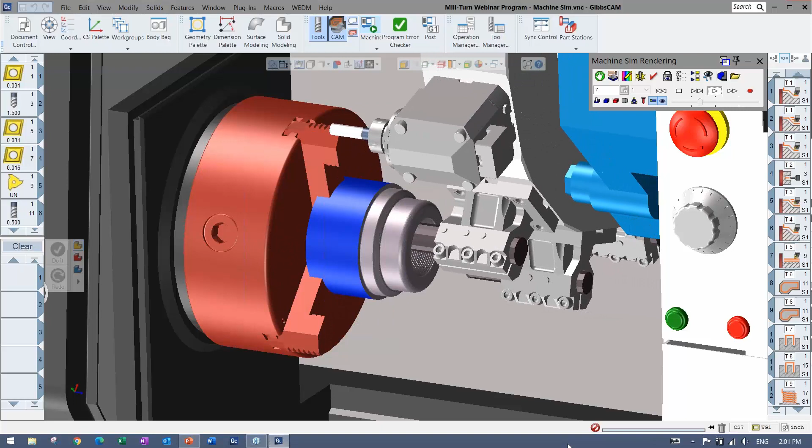I'm going to get right over to Gibbs here, and I have the part that I'll be demonstrating. You can see the full setup where I have a whole machine sim, the machine in there, fixturing, tool blocks, all the tools well defined. This webinar's purpose is just to show off how smooth and simple it is to go between milling and turning when using a machine like this that has turning but also live tooling in most situations. In some cases it can get even crazier with milling heads and lathes.

So we're going to focus in on a single turret and a single spindle, and I'm going to walk through and highlight all the little things. I'm not going to go too much into training mode here, I just want to get the point across of how it can be used, and we can go from there.

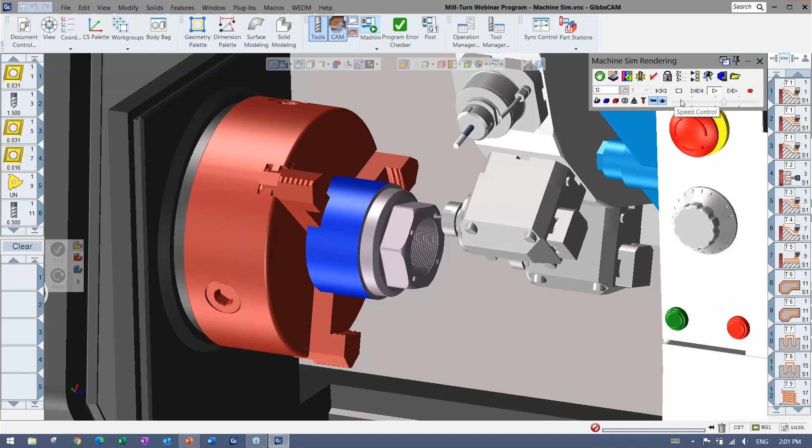The simulation itself, I'm not going to have that in the file right away, but you can get an idea here where it's really ops on the face, the OD, anything that you would expect to see.

All right, so I'm going to open up a file. I do have files that I'm going to be loading just to keep things smooth and running on time here. So the file really doesn't have anything done to it other than I've selected the machine quickly, and I've put in the stock and clearances.

I've even brought in a fixture here just to show you that you can do that. Bring in a model, download it, whichever, very easy to use. And you can hide it, it doesn't have to be shown at all.

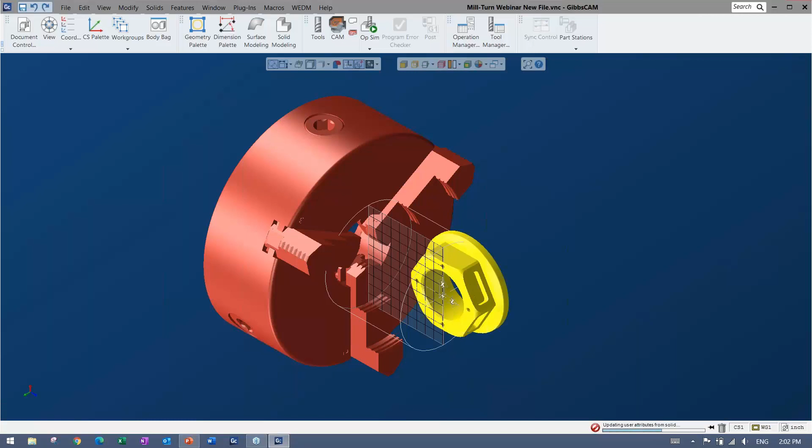I'm going to bring in a part as well. The part, when you're cutting something, can be a model like I'm going to bring in. I'm just going to import my part here, and you'll see a solid representation of it. But you can import wireframe geometry, draw wireframe geometry, dimension, modeling, all that can be done in GibbsCAM. So wherever you end up starting, you'll have something to cut in the end and to apply the actual tool paths to. You can see here everything's nicely defined.

Now once you have your part in here, there's lots of very good display preferences. You can hide things, show things, colors. Really the whole interface is very customizable.

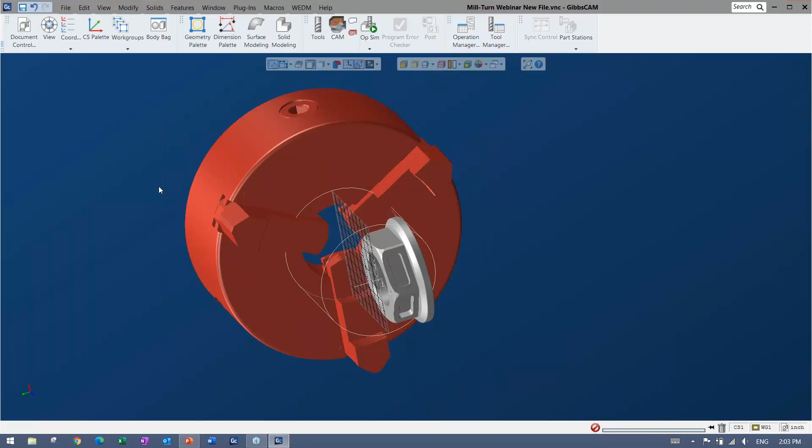Anything can be moved. So I'm using the default layout, but just know that as I go through, you can change it and add shortcuts and all of that good stuff.

Moving things around is also very simple. There's a view palette that you can use. I prefer to use shortcuts and my mouse or a space mouse. They're all available, and they can all be customized so that it's the same as other software too, which I find is very important when you're switching between them.

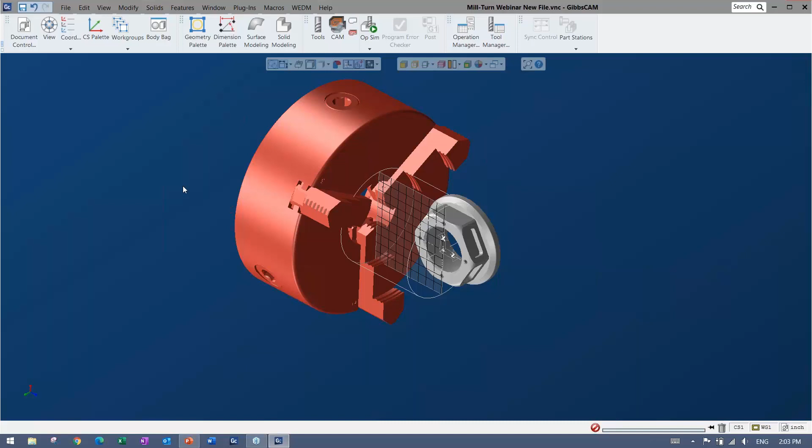Okay, so the first thing I'm going to do is I have this chuck here, and I'm just going to send it to this thing called the body bag. That's a little manager for the solids, and there are different levels as well that I'll get to when I'm engraving something. All right, so all the good stuff is there, and it's very easy to access even on the default layout.

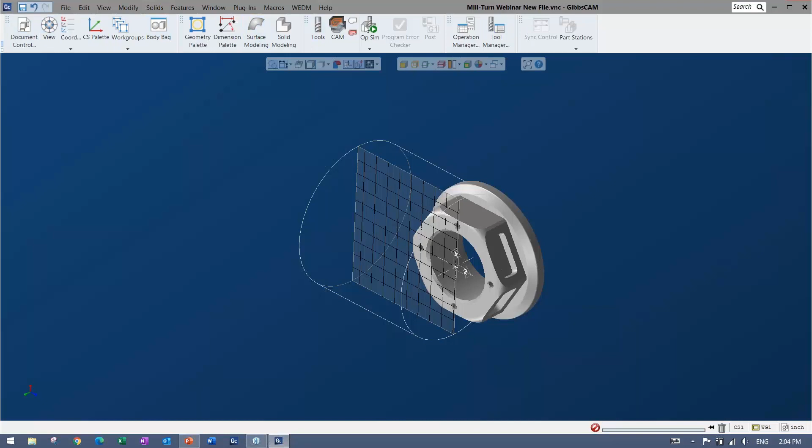Now, you can see my part didn't quite come in the proper way here, and there are plenty of tools to move things around, to locate your part, rotating, translating, all the good stuff, and some little shortcuts too. So this does come up for me, depending on how the CAD modeler has modeled things.

It could possibly come in the wrong way, and I'm just going to go in and bring up the CS list. These are coordinate systems, and you'll see them come up again, but basically just a machining plane, and I can go ahead and align this part to that plane. It just takes some of the angle out of it. Even if it was a severe angle, you could do a multiple lineup, lining up to one plane and then the other, and then be ready to go and machine your part.

So I'm happy with this. It looks like it's in the right orientation. There are plenty of tools to check it, but I know I'm good, so I'm going to go ahead with that.

Now, I want to cut, so I have something to cut. Now I need something to cut with. So that's when it comes into the tools. I find the workflow with Gibbs is very, very easy to understand.

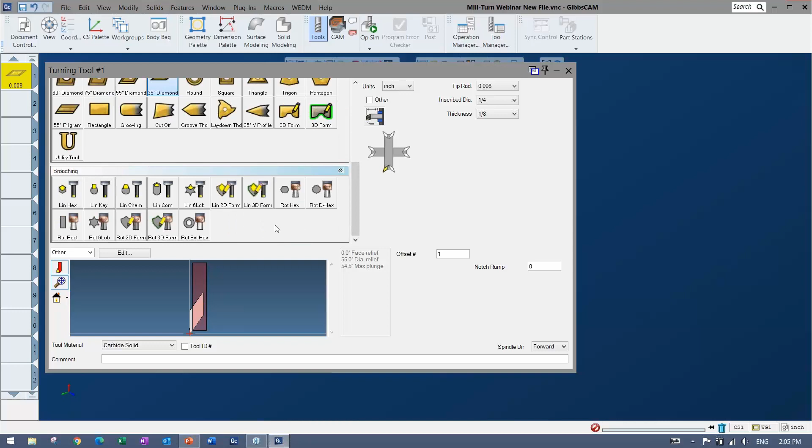It doesn't really change whether you're doing turning or milling. You can see here that when I make a tool, first thing you do is you pick a tool form. In these cases we have some milling tools, so that would be live tooling in our situation. We have our turning tools, and we even have some broaching, some linear and some rotary broaching in there.

All of these do have a form tool equivalent, as well as the tool holders. So you can draw, you can import a wireframe or a model and apply that as your tool shape as well. Once you pick something, you fill in the size, fill in the holder information, and then you give your offsets, can give a little comment, and every tool is like that. So if you're making a tool from scratch, it's very simple. It's easy to find your way around.

Now, as you get into programming, the better thing would probably be to have some way to bring in tools. So I'm going to be doing that coming up. You can definitely load tools and all that good stuff as well.

Let me just pick maybe a standard insert here. Tool holder on it there. And you can see the preview is all nice and 3D as well. Boring bar.

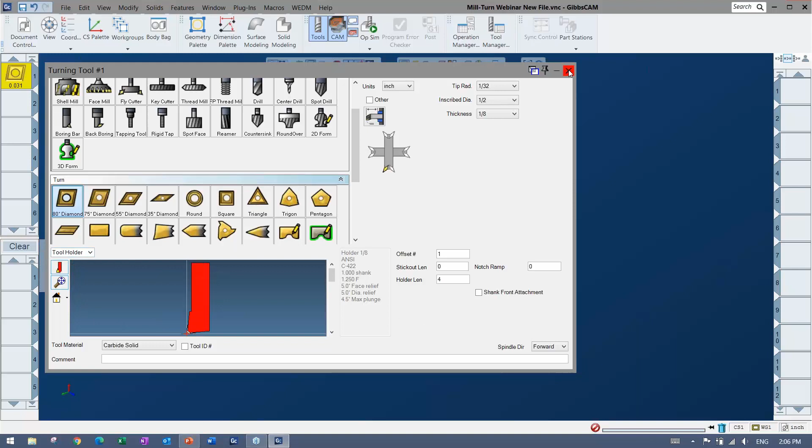So once you have a tool, whether it's a milling tool or a lathe tool, you bring it down to what's called the process list. This is really where everything gets added together and set up before you actually make it into a tool path. Now, depending on your license, you may or may not have everything that you see on my screen.

But this is how it works, where you either drop your tool down in here and you get access to the process types, or you can go it the other way around and double click here, select a process type, and it will filter through all the tools it thinks you can use. And you pick it, and then it all gets there in the end to a dialog that would set up whatever you're setting, whatever your tool path process type is.

So whether I'm doing a contour here or roughing, threading, there's elliptical contours. There's a process for pretty much everything. We're going to stick to certain ones here, but if you don't see the ones that you wanted to see, then obviously you can put in a question or ask your local reseller.

Now those as well are loadable. So the best way to do it, you have to make your tool most likely at some point, but I actually have my tools and my processes created, again, to keep things smooth and keep things under the time limit.

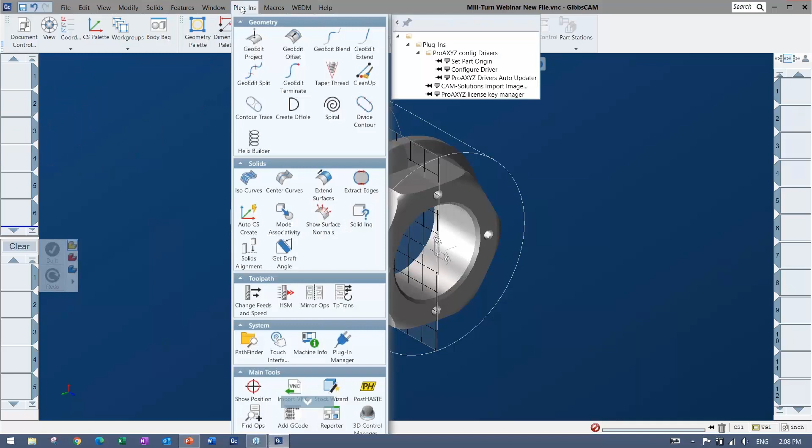So you can load tools here, and there's tools that you can save yourself. You can also use different plugins, like Sandvik has CoroPlus. There's also the Helical Solutions and the Harvey tool libraries here, and some other solutions for that as well out there.

So in that case, maybe I have a process already set. You can see here I've created a folder, and it's just Mill-Turn webinar, but I'm going to go ahead and load out of that. But you can make your own folder system by machine, by material, by tool type, whatever you'd like. And when you load it in there, then you can see if I load a tool, I get the tool.

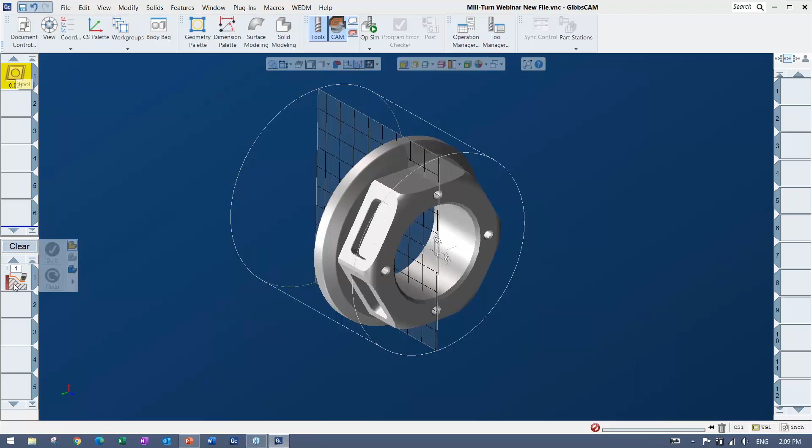And if I load a process, I get the tool along with all of my parameters filled out already. So that could be anything from feeds and speeds to what type of process or what type of cut you want to do, right? So the one that I've imported here is the facing process.

All right, so we're going to put that onto our model. And again, the workflow is always the same. You'll see as I go through, make tool, drop tool down, pick what tool does. You get a dialog. Everything's all in that dialog. There's no hunting around trying to find different things. And once things are filled out, then you can apply the actual toolpath to the part.

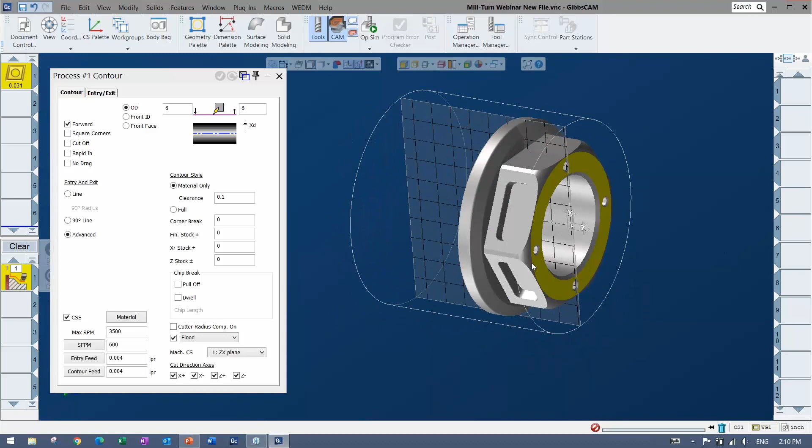So that's the place I am at right now, and depending on what process you use, there's different things to select. I could be selecting the model, or selecting some wireframe geometry. I may extract some geometry from the model, or if it's already drawn, I can use that.

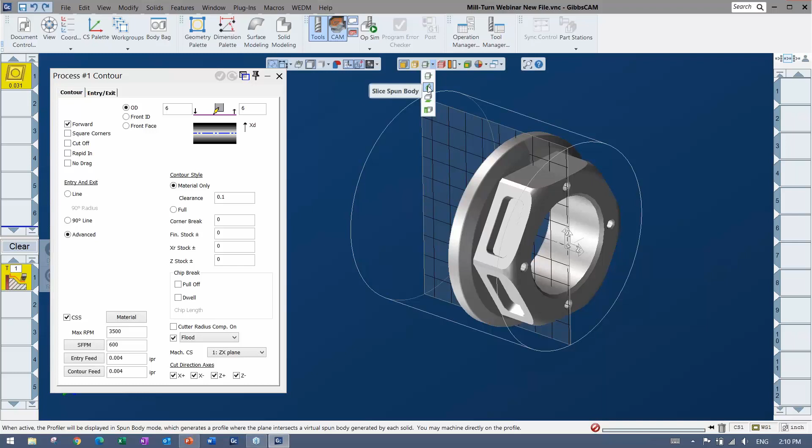In this case, I'm going to bring up something used to turn on solids. It's called the profiler, or the slice plane. It has a certain mode. If you see the slice plane just as it is, you can see that it slices through, and it's not really what I want to use to turn this part, because if I turn this guy, it's going to gouge in the higher areas.

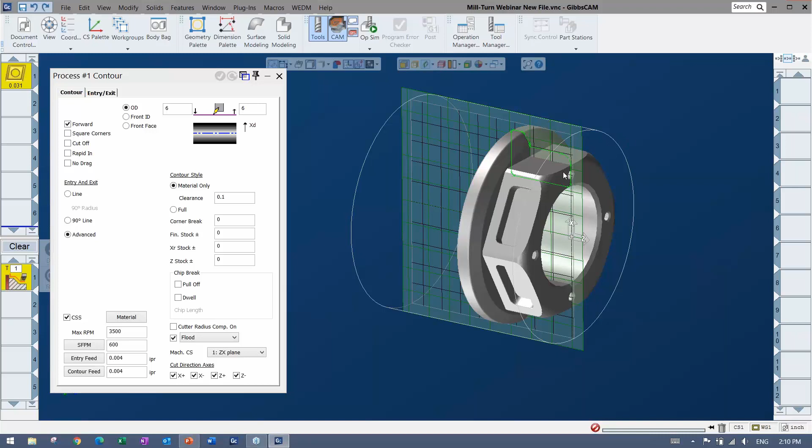So what I'm going to use is slice spun body mode. That one's really great because you can never bring that slice plane off zero, off the center, so you know your diameters are right. You can also see it's showing all of the highest points, and getting rid of anything you can't hit while the part's spinning, like these holes are not being sliced anymore.

And you can extract geometry off of that, or you can just go right in and use the profiler. So that's going to be what I'm going to pick for this specific toolpath. A contour or roughing, anything with a specific shape, is usually going to need some kind of profile like this or a model.

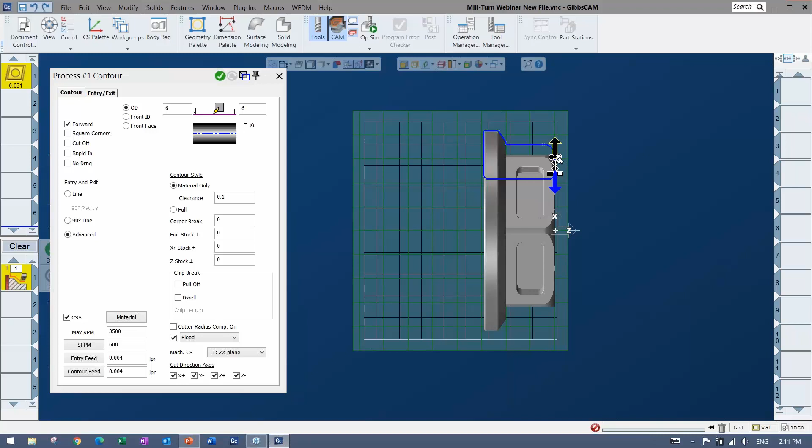Now when applying, in this case, our lathe processes use these start and end markers that are quite easy to use. That's just about where you want to start and where you want to end, and what direction you want to go. And then whether you want to go all the way around or one skim on the face, like this.

I'm ready to do the toolpath right now, but I'll mention you can move these by specific amounts and all that. You might see that come up. I'm just going to kind of place things where they are and rely on this material only to prevent any air cutting. Even though I drag this up here, when I do the toolpath, you'll see it avoids that.

Now, once I'm ready to make the finished operation, notice my operation list over here is empty. So I'm going to go in and say do it, or anywhere I right click, there's a do it. If I click that, you can see the toolpath appears, and I have my finished operation over on the side.

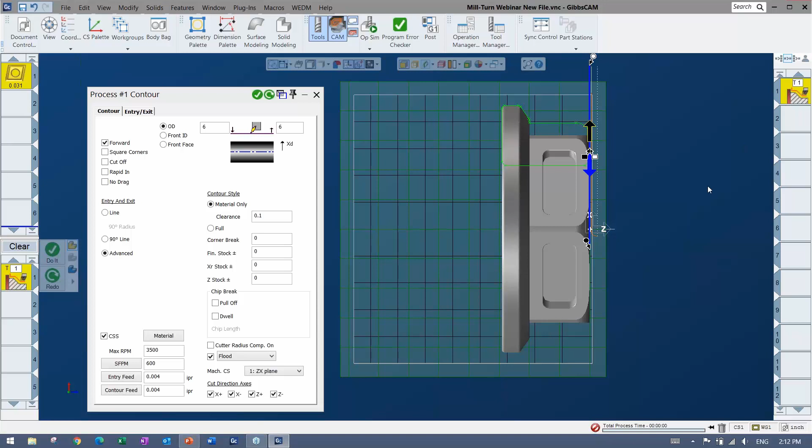Now, if I wanted to change something about this, that's when redo comes up. Redo will recalculate the toolpath based on whatever changes you made. So if I didn't want to go down as far, let's say, you can see that it shortens that guy up. But once again, it knows there's material being removed, so even if I drag it past that center mark, it doesn't go past. I can always override that as well.

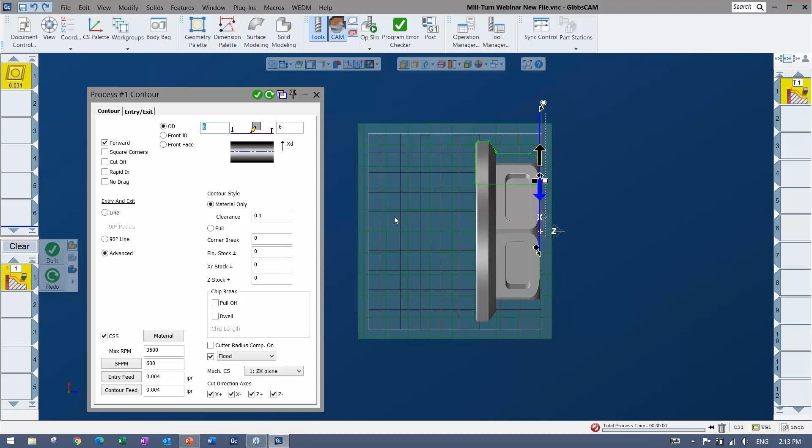So that's the gist of adding the toolpaths, and I'm not going to go into much about what each thing does, because I get into training mode sometimes. But I'm just going to clear this off, and I'm going to go ahead and check out the simulation now.

Right, so we have an operation, and I'm wondering, I want to watch that. So what I can do is start my sim, and there's a couple different simulation modes. There's the one that you saw with the whole machine and everything, and then there's the one that back plots, where you can rewind and play. This one is also a nice one called OpSim, and it'll show whatever you want to play with, tons of useful options. I'll bring them up as I look through the rest of the toolpaths, stopping anywhere you want, different colors, checking to see if the simulation matches the part, etc.

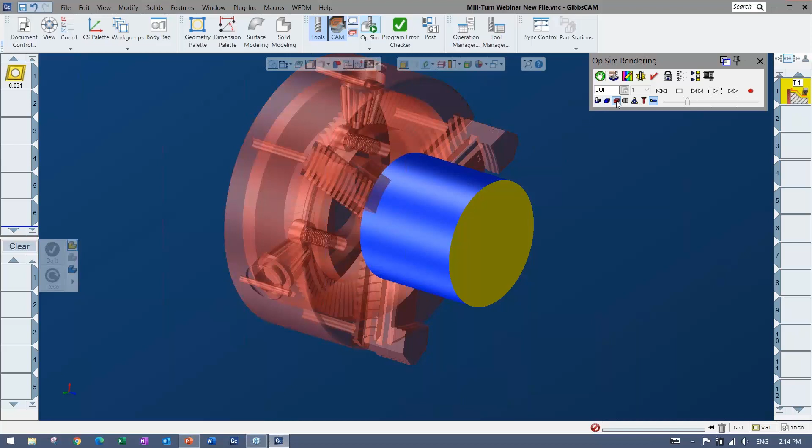All right, and you can see, even though my picture was hidden there, it's showing in the sim, and I can always turn that off as well, or make it transparent or anything like that. You can see I have every little part in there of that picture.

So I'll pop in, and you get to the point where by just looking at the toolpath, that's probably going to be fine. If you see a little line going right through the part, then that's probably when it's bad. But I'm going to try not to do that.

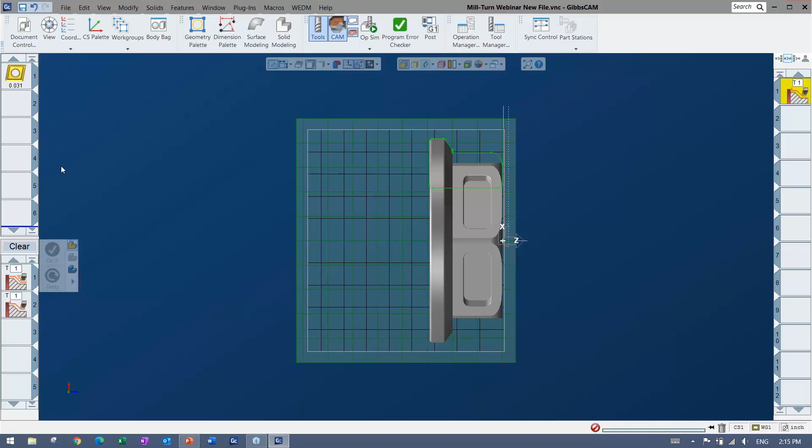All right, I'm going to load a couple more in here. Not going to dwell too much on it, but here's some roughing and finishing, let's say. You can see these are stacked together, and they'll apply to the same selection that you make. You can do roughing and finishing tools, and here you can see that one's using the same tool and it recognized that, so it's not going to make me a duplicate tool. This one's going to go ahead and rough this in.

All right, I'm going to start picking things out here, and depending on what you want to rough, there's little shortcuts. You just do something like that, and that selects everything that I want to cut. I can say do it, and you can see it generate the cut there.

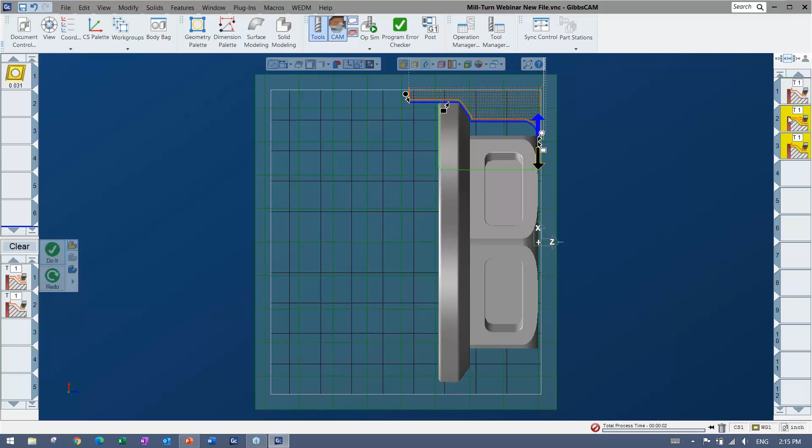And I have 2 more operations. Again, I can pop open the simulation if I want. I can play it and check, is that okay? Anything crashing at all? I actually put on this one, it's hard to see, but there's a chip breaker. I thought about using the pull-off, but there's lots of options in there once you start digging that you can use. But nice and easy.

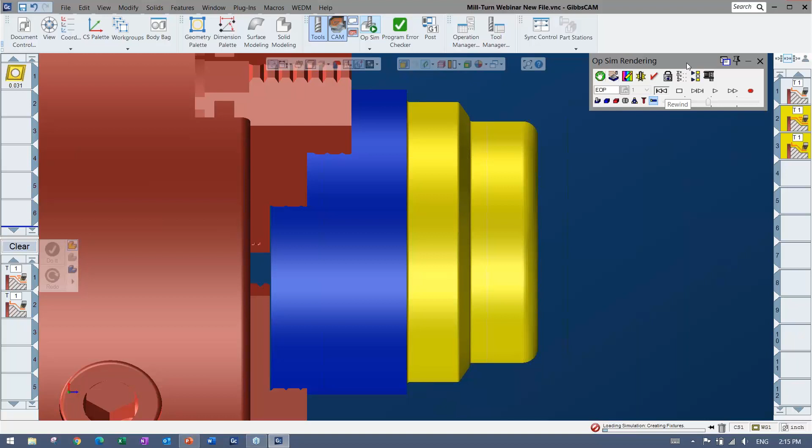I got my thing. My OD is turned, my face is turned. Again, this is a demonstration, so don't give me too much stuff about the actual methods. I might cut things differently in other situations, but let's move on to doing a little bit in the middle here.

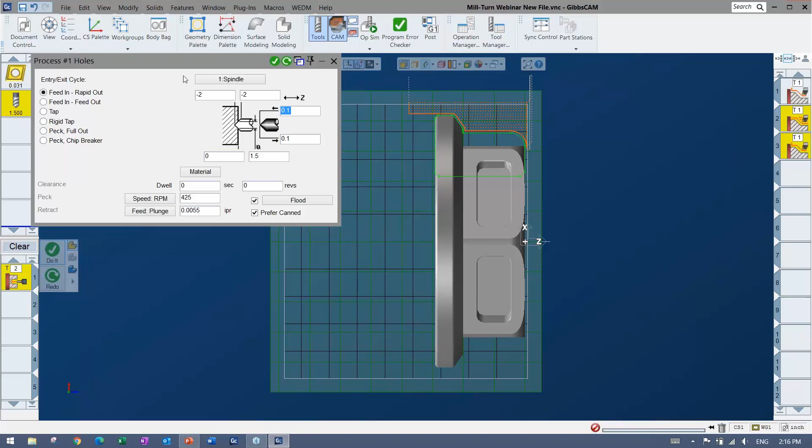So here's an example of one process that doesn't even need anything to be selected, right? What it is, it's actually the U-drill in this case, but you can see here when I have a tool that can do both, I have live tooling drilling and then on-center with chuck spinning drilling. One's going to give me the on-center, and that obviously can't go anywhere but on-center, so I can just go ahead and say do it, and I don't actually need to select anything.

I'm going to go ahead again, maybe I'll do some rough and finish and threading. These, if you're making them by hand, great, but definitely save them if you can. If you use that same material, especially those same tools all the time, you can even have your whole tool list in here and possibly your whole machine sim setup before you even have any kind of thing going on, where you might have a template file that you don't even have a part in and you never change your tool locations. That's all doable, all doable.

And here again, you can see the material only, picking up that there's material back here. And if I didn't want to go back all the way, I could always redo, just kind of shore it up, and it's very quick to just redo, or redo with a redo shortcut.

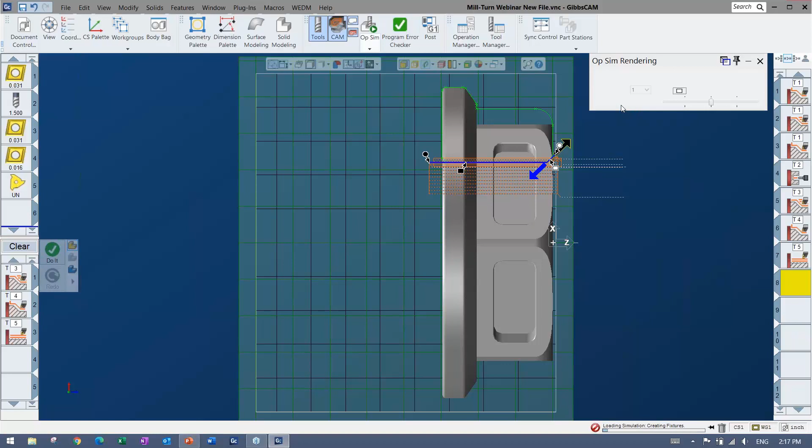Again, checking all the way if you want, or doing the whole program and then checking is perfectly fine. But for any inner diameter work, you can see there's a little cutaway, so I can actually see what's going on inside. You can see that's cutting, and obviously looks like the thread's going on in there. The transparency could also be used as well.

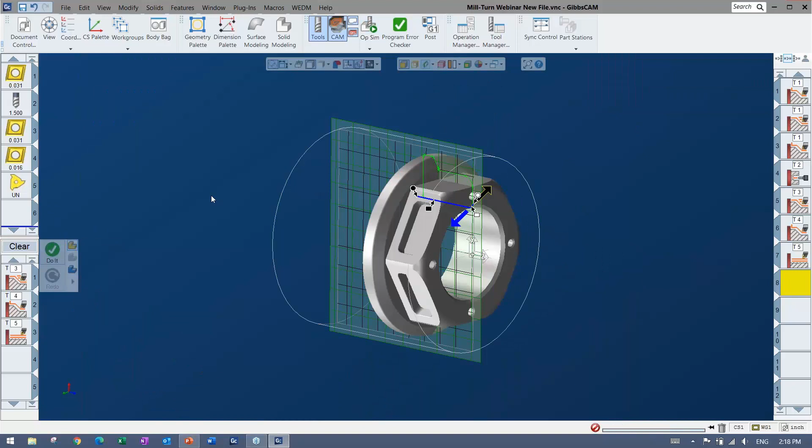I'll play it all a little slower when we get to the end there. But next up...

Let's do some actual live tooling. So you saw that the turning was very easy to put on. It's just one plane, easy to set up. But I don't have to jump into another side of the program or anything. If I want to start milling, I can just go between milling and turning all I want. I can reorder the processes, or the operations, if I don't like the order that they're in. Anything like that is doable. It's very easy, and then reposting the code is very easy as well.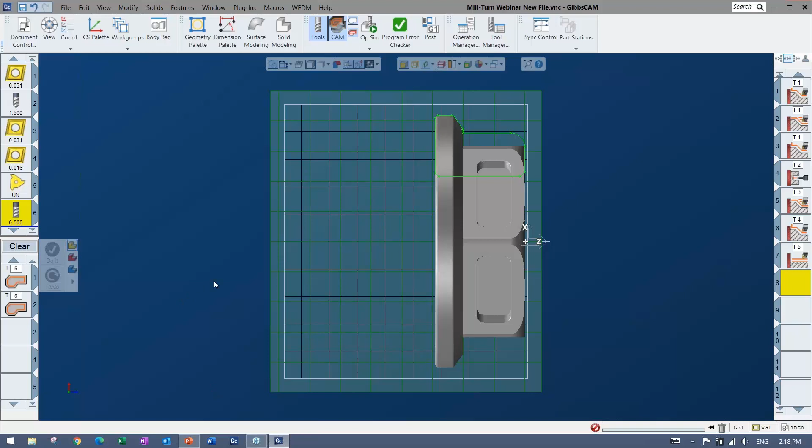So I'm going to go ahead and rough this hex out. In this case, I'm coming in on the face. You'll see the tool is very easy, and this is now a milling tool. Again, you're just picking the form, putting in the dimensions. Offset's a big deal, obviously, and tool holder can be in there. I don't have tool holders because the machine sim tool blocks are taking care of that. But this is the main thing I wanted to bring up, where you just have a little indicator where you want to point towards.

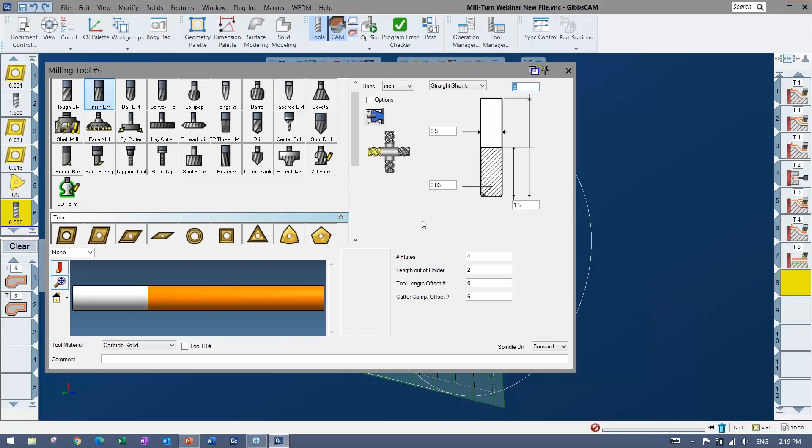And these ones kind of allude to some of the more advanced machines where you might have something like a sub spindle or a lower turret. So I have this guy pointing towards the face.

In my actual process setup, this particular machine, I can always make more CSs, but this one has CSs created already, and you can see that this is going to be done on the XY plane instead of the ZX plane. I'm going to say, get on the XY instead, please. And you can see I've also switched the mode to slice plane, so I can easily get this geometry.

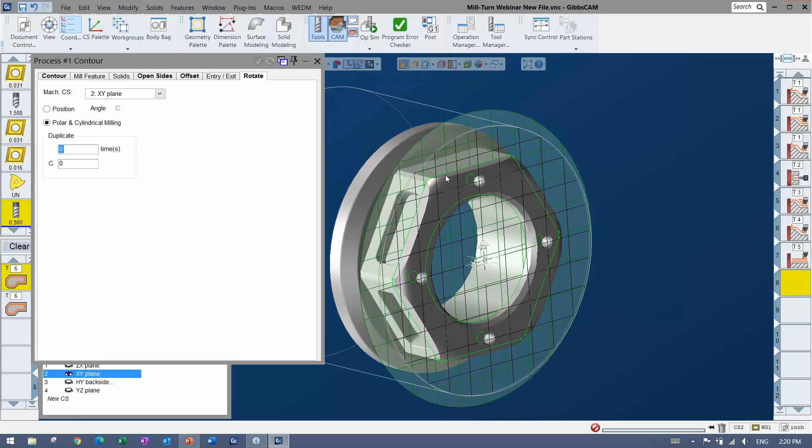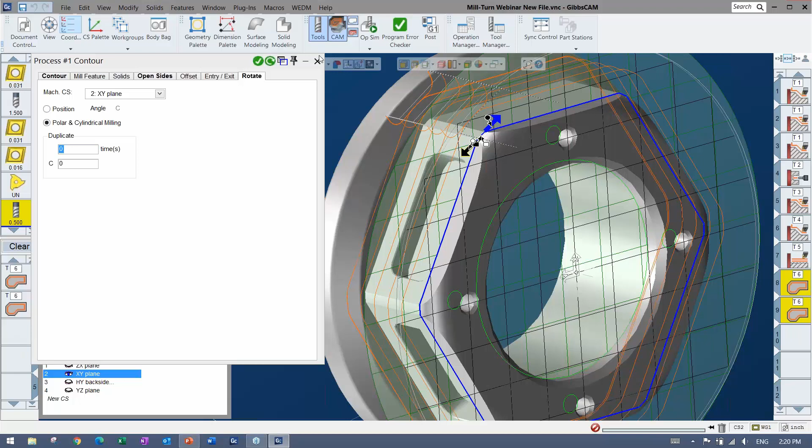Things like spot drill tap, and you never have to look up the pilot hole size anymore. It loads in with all of the right feeds and speeds and everything. Nice and easy. And that guy's going to hang out there, and once again, I can come in and simulate.

This is where we have a specific option that we could go between. So why don't I go ahead and skip to this operation? I could either select to just go all the way to this operation, or buffer to this operation, or I could just simply play just the selected operations here. I'm going to watch it.

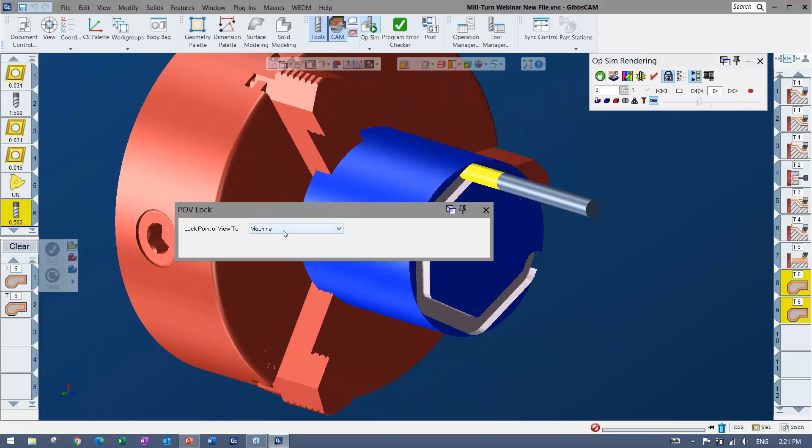This is having to do with rotary milling, so this allows you to watch it as is if you want. Or I could go ahead and set it so that the machine is actually doing the motions it would do, which would be the C-axis interpolating, doing more rotary milling, or polar and cylindrical. Or if I wanted to change that at all, I can just come in here, and literally it's just one selection where I can set it to the position instead so that it does X, Y, Z, if possible.

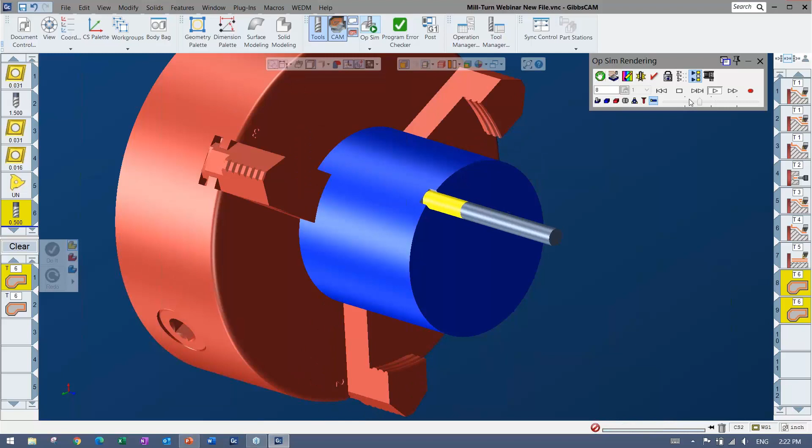You can see no C-axis movement. Didn't have to repick anything, didn't have to do anything special other than that one option that I changed. Now it's using the X, Y, and Z, and you might use one day and the other. It depends, and if you don't have a Y-axis, it's absolutely a must.

So that hex looks good. I have the rough and finish process there, so that should be good and ready to go. We've got a couple more holes on the face here. I'm going to come in here and do a little thread milling.

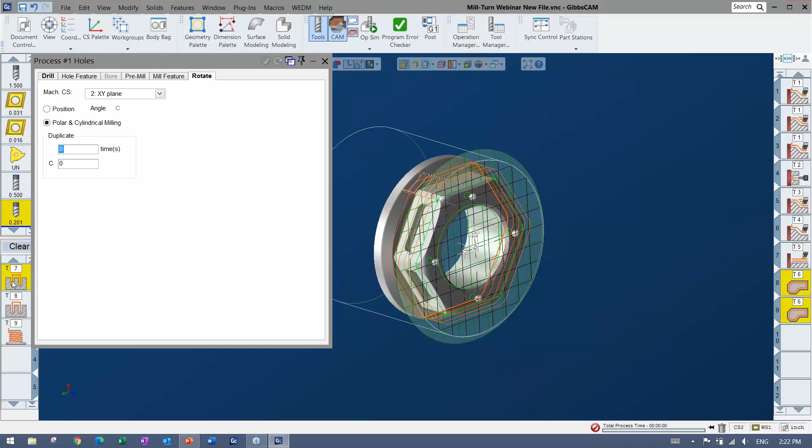Once again, just making sure we're on the XY plane. I have a drill, I have a chamfer, and I have a thread mill. I already have the profile selecting what I need, so I'm going to go ahead and just grab those and do it. There you can see those three that went together and were already set up maybe from last time. Have just made my life a lot easier.

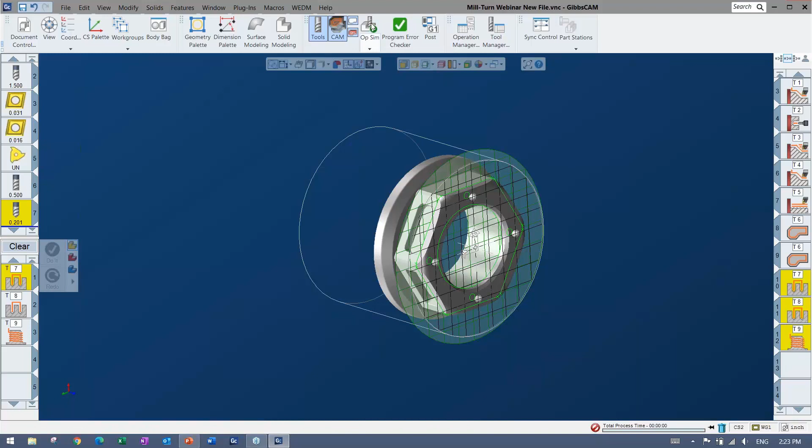Again, same kind of thing too, where I'm coming in here and I can simulate and watch and see if I'd like to change anything about it. But this again would be a good one to do the polar and cylindrical, keeping that turret up in the positive here and coming in, spotting, and then you can see here the full profile thread milling, which is another thing totally supported, very easy to use.

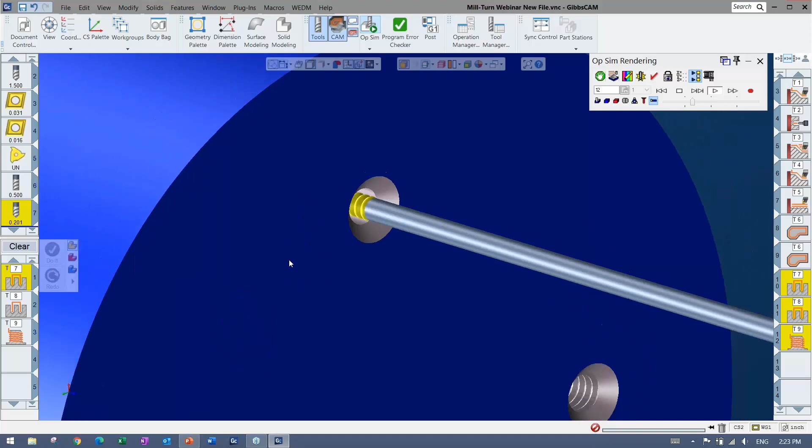Again, just making a thread mill tool, dropping it down, choosing thread milling, filling in all of the parameters. That's using the C-axis or the positional once again.

So this part's coming along. That's about all the face work I'll do on there, but obviously we could also be coming in on the OD, so I'm going to go ahead and load something for that. And the first one is the pocketing on the outside. Once again, if we take a look at the tool, nothing really different about the tool other than it's a smaller tool, of course, but we have it sticking towards the OD now.

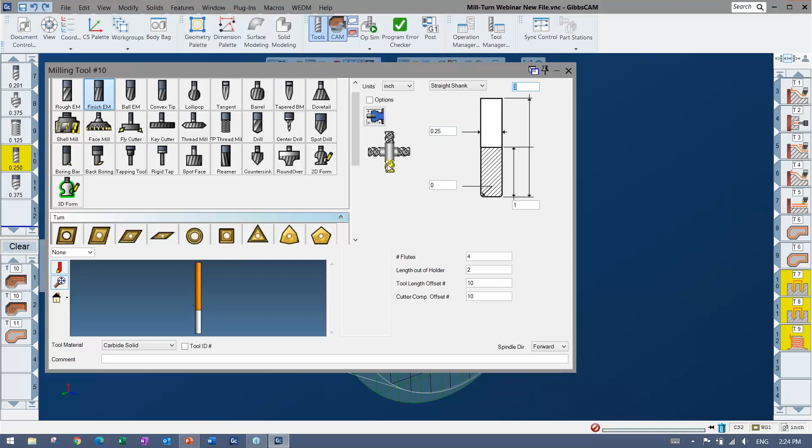The worst thing that can happen is it makes the tool path, you simulate, and you see that the tool is the wrong orientation, so you change it. Or a warning comes up saying the orientation couldn't be achieved. That's not a problem at all.

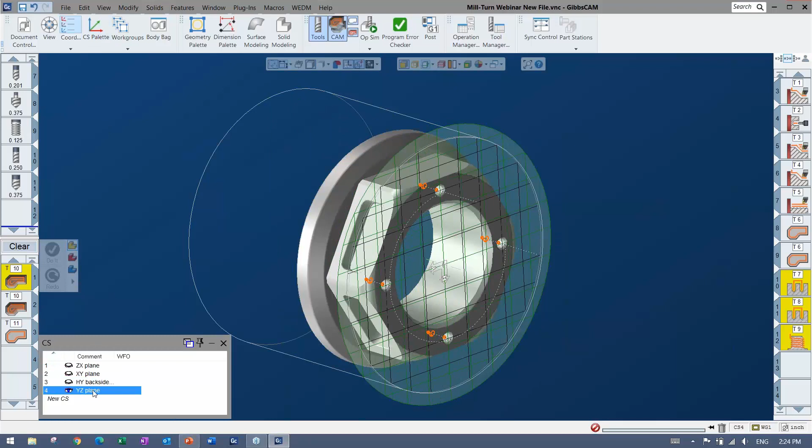Now if I look at my planes here, I don't actually have a plane that would angle to that pocket. If I take a look at any of these, I'll either have to use an angle option I'll show you in a second, or I can go ahead and make a new CS plane. It's very easy - in this CS list, I'm just going to hit new CS and call it pocket.

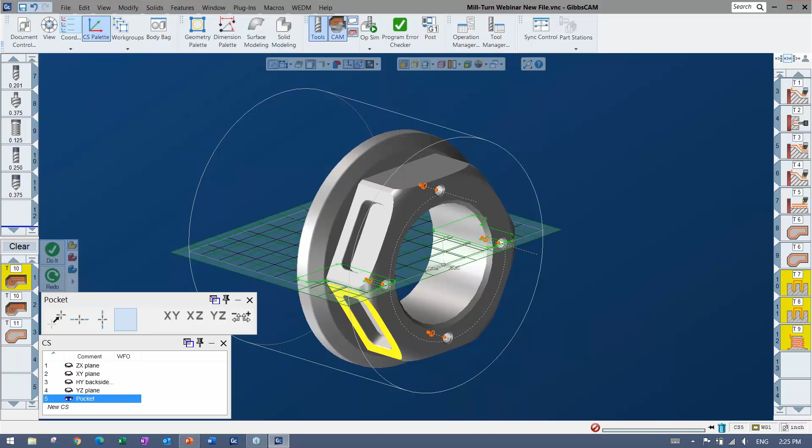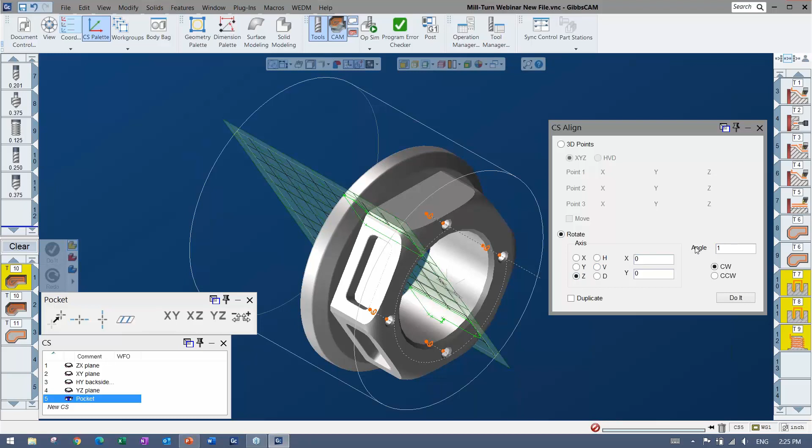I'm going to open the CS palette, which actually creates or moves the CS, and I'm just going to align it there. You can see, depending on what you have, there's a negative and a positive, so I can always flip, or go to the other side, whichever works for me in that situation. I could also do a rotate, maybe a 180 rotate around - all I'm doing is putting it on the positive side.

I'm going to do it off the ZX plane - let's do that one there. Pocket. My profiler adjusts to it.

So I can reposition that to take another slice of whatever I want to cut. Then inside of my process, I can say, hey, there's my pocket CS, or whatever you want to call it, the angle it's coming in or what it's doing. Select that - also notice that I have a duplicate here.

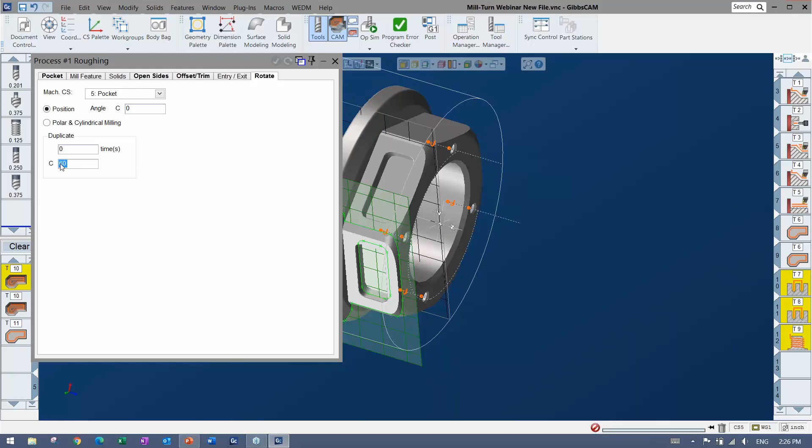Maybe I'll just do it without the duplicate first. I still have a duplicate in the other one, but you'll be able to see here - I'll turn them off to get the point across. Basically however many times that pocket happens around this part, I can always say, hey, duplicate this same feature around however many times I want by whatever angle. It makes it really quick to create, instead of doing another CS, even though that's pretty quick too.

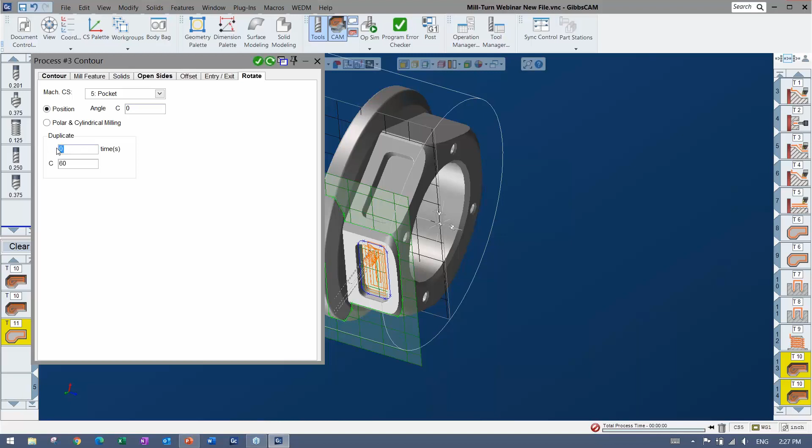So if I said 1 times 60 in these cases, you can see that's been duplicated and it will cut both.

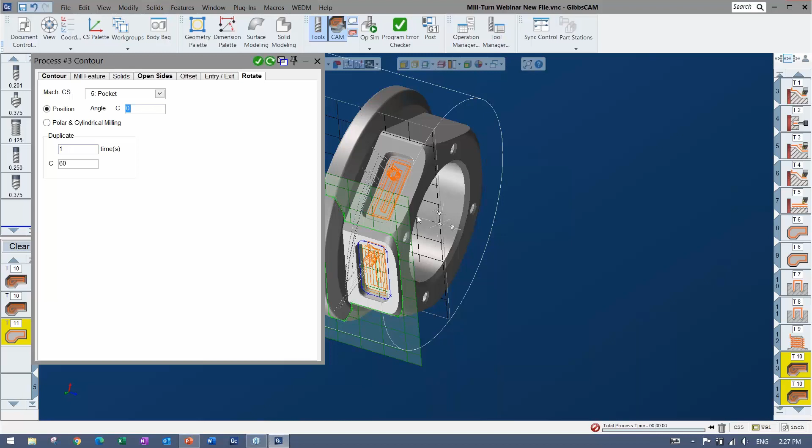Now the order depends, but you can always reorder on the op side, or I can also put specific angles to start from. In this case, I actually have those same pockets on this side, and those are 180 away, so it's possible I could do a 180 here and do it instead of a redo to create two more processes here. And I've got the 180 in the other ones.

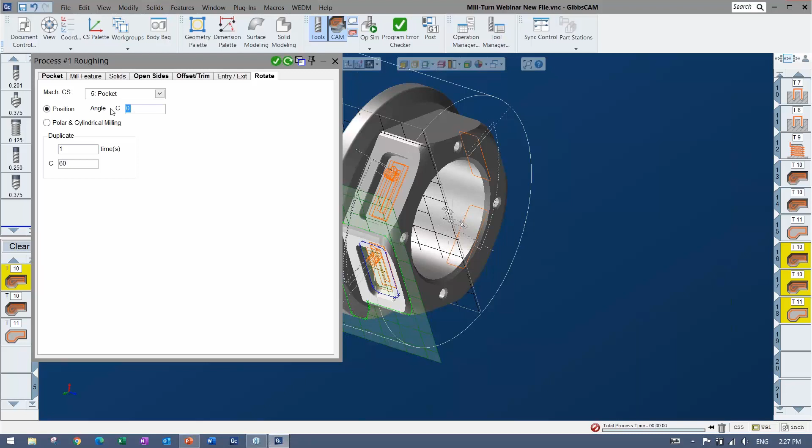So no matter what you're doing here, however many angles, if it's a weird angle, if it's not equalized all the way around, there's a chance you can get to it using this. Obviously the coordinate systems are always there and very easy to place, especially if you have a model.

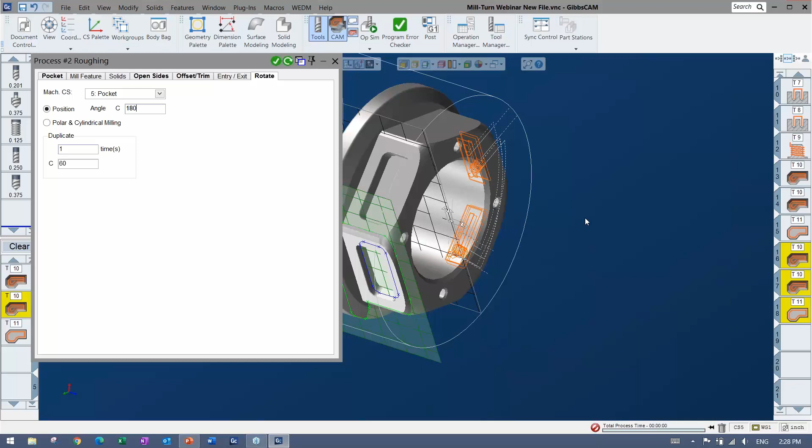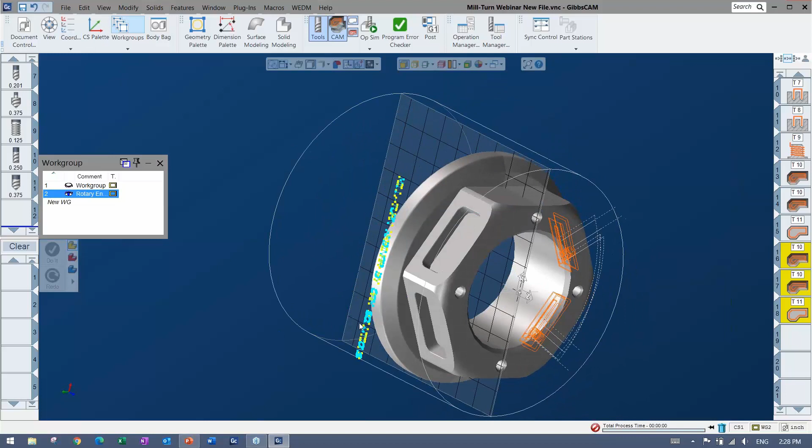Now, one of the last things I'm going to show you are the rotary milling once again, and I actually have some text in a work group here - here's some text going along there. I'm just going to switch over to that coordinate system and basically wrap this text around because I want that to be written with rotary milling.

It's very easy - once again it's just like you're doing a straight contour, but you're going to be doing a polar and cylindrical. If I load up this rotary engraving, it's a normal, regular contour, but I have polar and cylindrical. Maybe I'll do that one again, 180 from there.

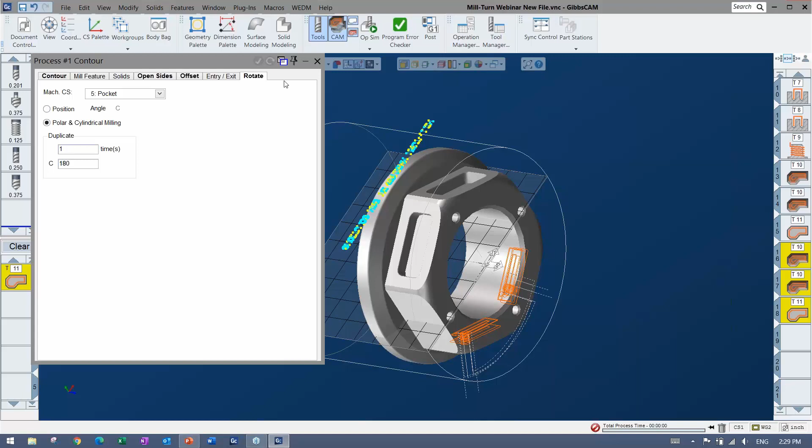There's lots of different methods of selection - I'm going to just turn off the solid, let's say, and select like that. And say do it - that's going to write them all down and wrap them around like so.

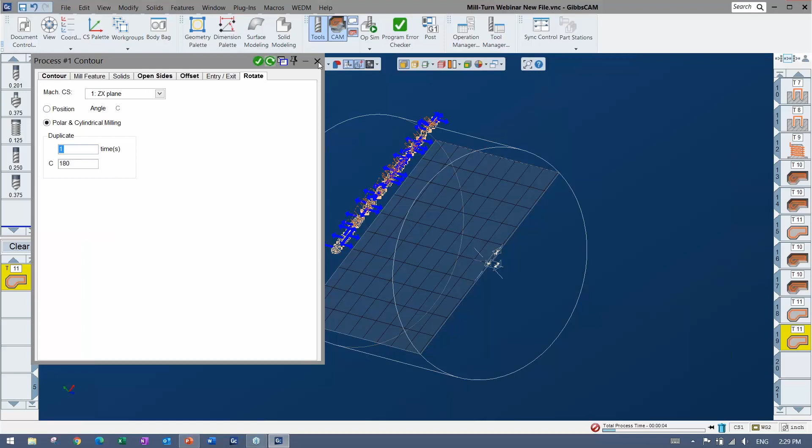I'm going to go ahead and play out to that - maybe I'll use this one for that. Again, I'm going to start or stop before operation 19, let's say, and I can turn that on, and that means it's just going to play as fast as I want, then stop at that operation. There's also a way to buffer it in so that every time you rewind, it goes to that operation.

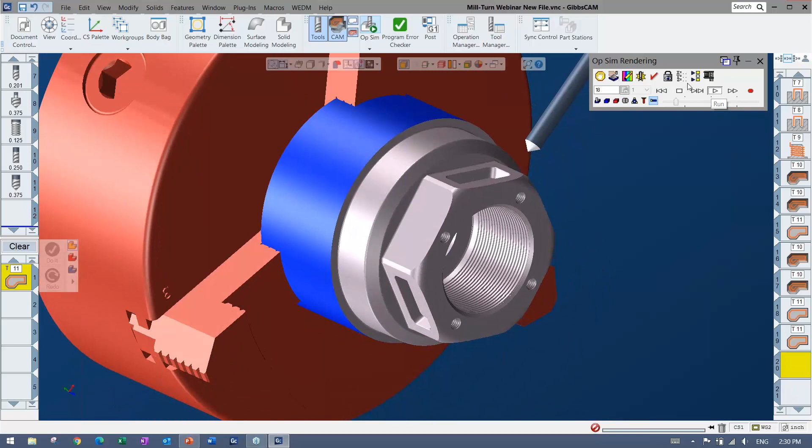Here you can see it coming around and doing some rotary engraving. There was nothing special about the text - there's a very quick text creation tool in the geometry palette. You just put it at the right radius.

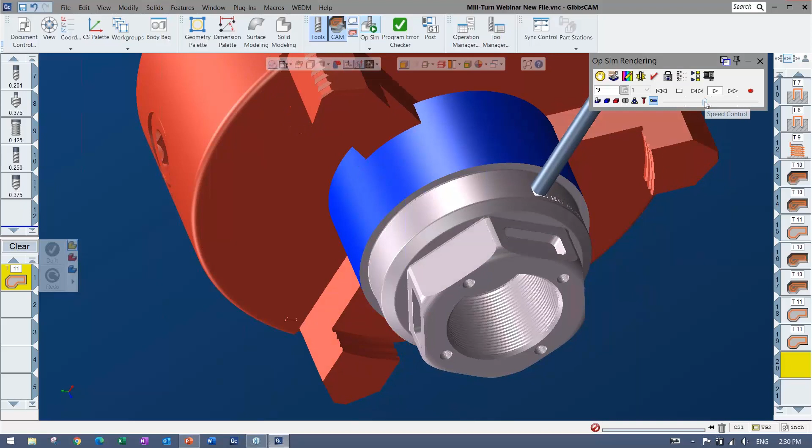It doesn't even have to be wrapped - that's what polar and cylindrical does. Now it's going to go ahead and engrave around there, and then because I duplicated one at 180, it's going to go ahead and cut on the other side as well.

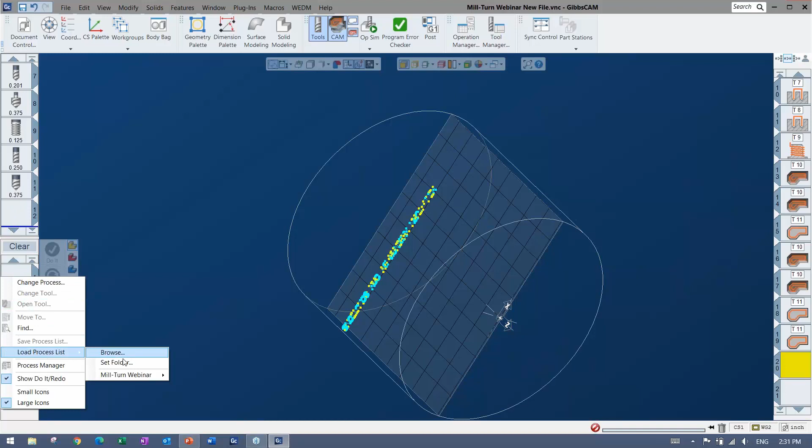Now this part's pretty much done, so all I need is the part off now. Going back to the turning, I can just make a turning tool or load a turning tool, and there's no change in where I am or what I'm doing. This one I saved with a tool holder, so that's why that came up there. But if I don't want it up there, I just throw it in the body bag and it's safe for when I need it.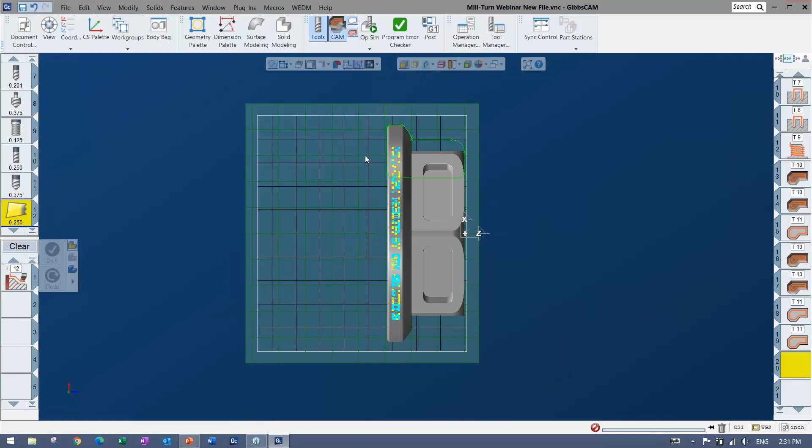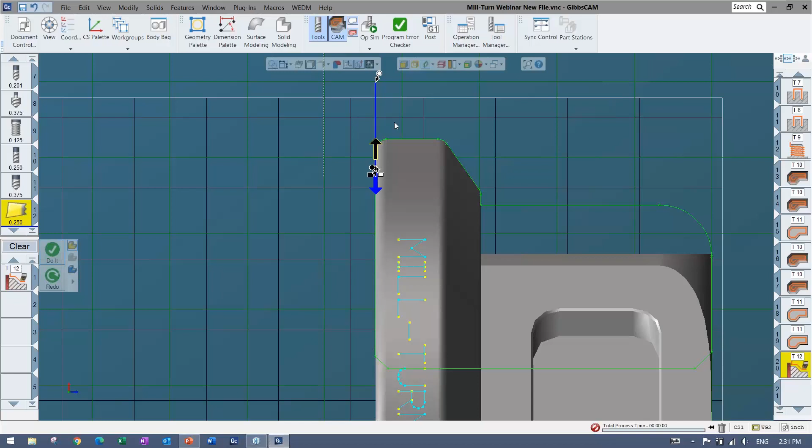Probably going to grab my slice spun body again. I'm on the correct plane. I have a little feature here. You could leave material and finish up after, but maybe I'll come in, go this direction, down a little bit, make some room for myself. And I could come in here. Different things like lead-ins, lead-outs, all that kind of stuff is totally doable. I could arc on or anything you want there.

There you can see I have some part off thrown up there, and that's essentially my program. So why don't I go ahead and watch this one, and then I'll bring up the machine sim again real quick.

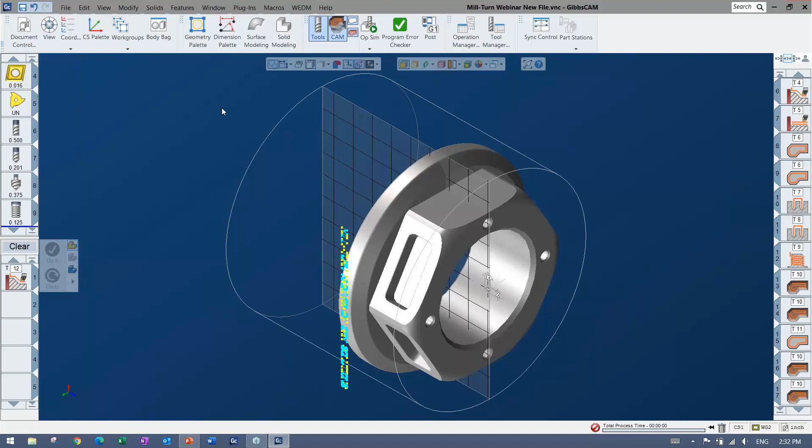Notice I didn't rewind or anything, so now it's going to just go ahead and move along. Oh, my bad, yeah, I did go a little bit too far past it, it looks like. I can throw a stop there. Let's do 20.

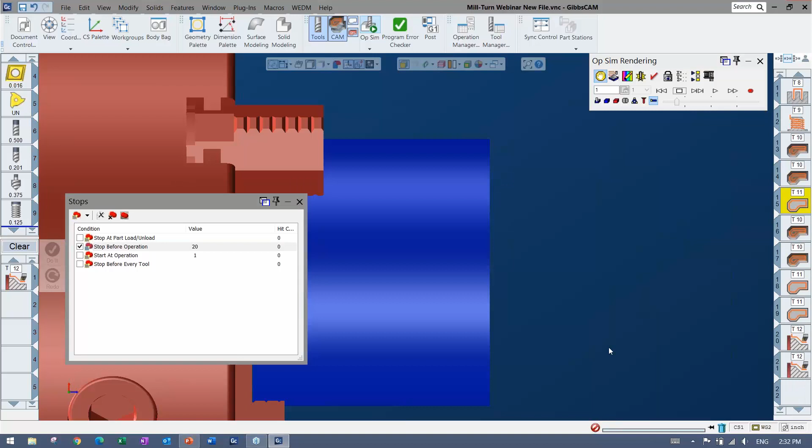I do know plenty of people that when they're programming, they are programming with all of the machine sim and tool blocks and everything there. They may have that set up. I have a lot of people I know that have a specific setup and they don't touch it after that. That's easy to do with a template file.

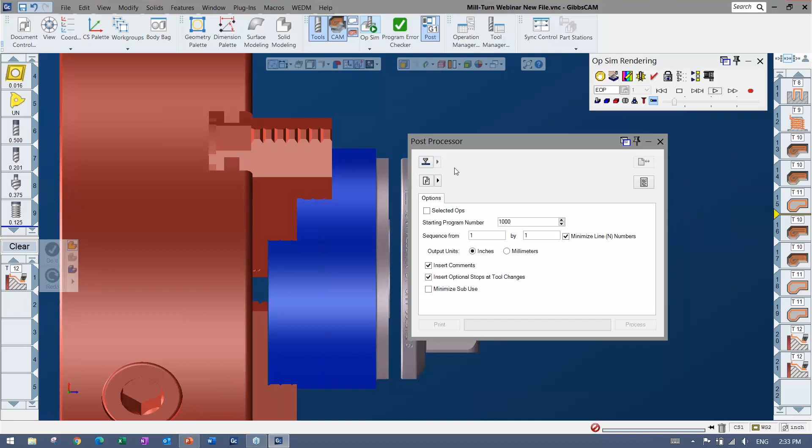Thumbs, parts off. Looks good. Once I'm ready, I have a program error checker that I can do. There's collision checking; I can set it to tell me if something hits something else or anything like that. And then when I'm happy with the program, I can load up a post processor and post that code. The post processor is customized for your machine.

So there's lots of things you can do there with different machines it can support. Why don't I bring that up again? I'll save this guy, and I'll bring up the machine sim once again and just play that for a second. You're seeing a mill turn here, and this machine actually has a sub, so that's why you can see this—I'm just not using it.

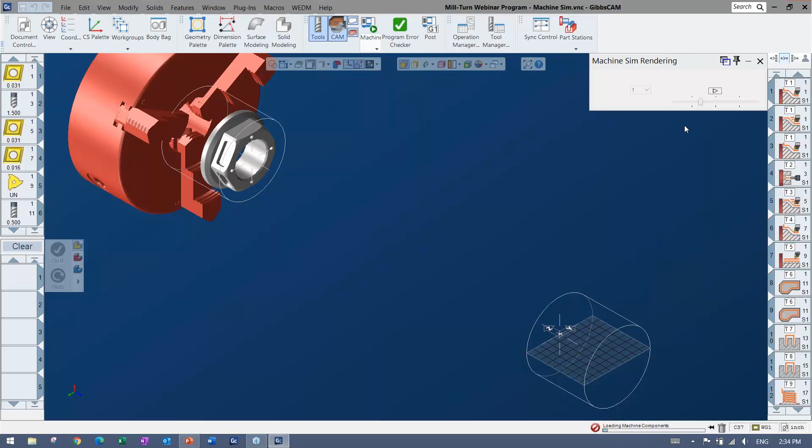But I'll bring up another machine sim that shows you can really go up in advanced kinematics. GibbsCAM can support so many different configurations and different kinds of machines. It's all just about configuring the MDD, which is the machine side, and the post, and getting things set so that it makes the right code every time.

And anything I can do the cutaway or anything like that, here I'll move it along a little bit. You can see the C-axis doing its thing, thread milling, and then doing the pockets. Things are pretty close. I want to make sure those things aren't hitting. So this is a good way to do it without having to sacrifice anything or having a heart attack at the machine.

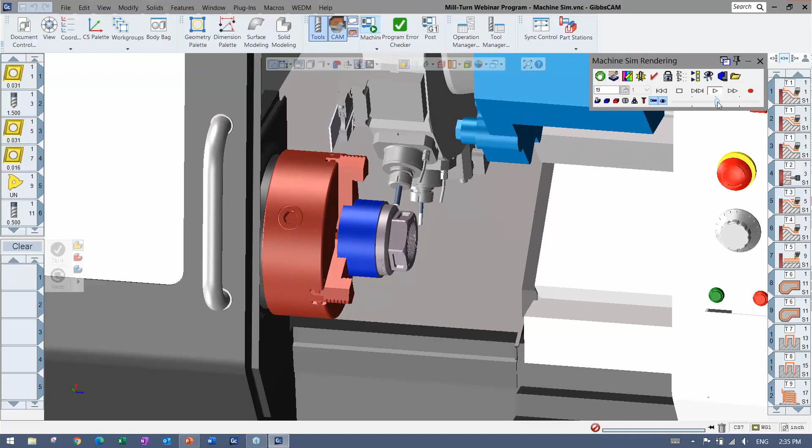There's the engraving, and then the part off. Once again, this one has a sub spindle. I'll bring up another one here that also has that—just a couple different options you could look at.

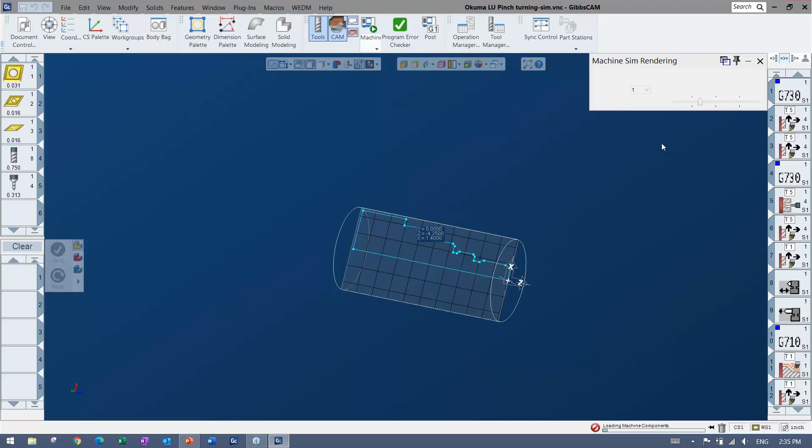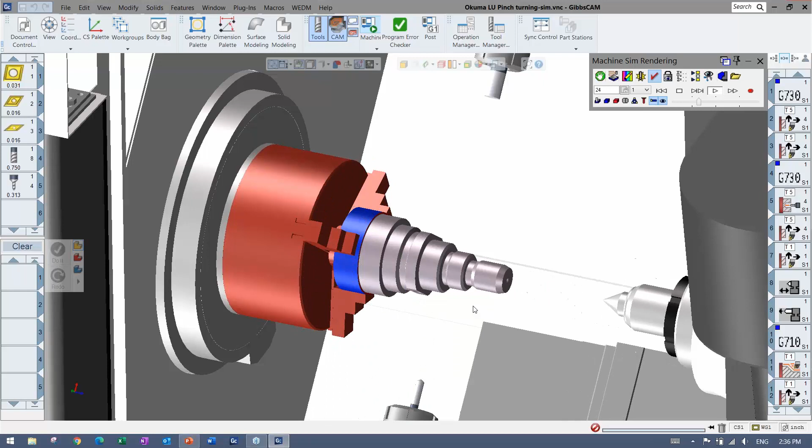This would be more considered MTM, so I'm sure there will be or has been some kind of webinar or video on that online. Here you can see a machine with a programmable tailstock, and it's got an upper and lower turret. It's doing pinch turning, it has wait codes, things are overlapping operations to save time. So that's all pretty much equally as easy, I would say. Everyone has to learn something, obviously, but it's all supported, postable, full machine sim once again. It's a beautiful thing.

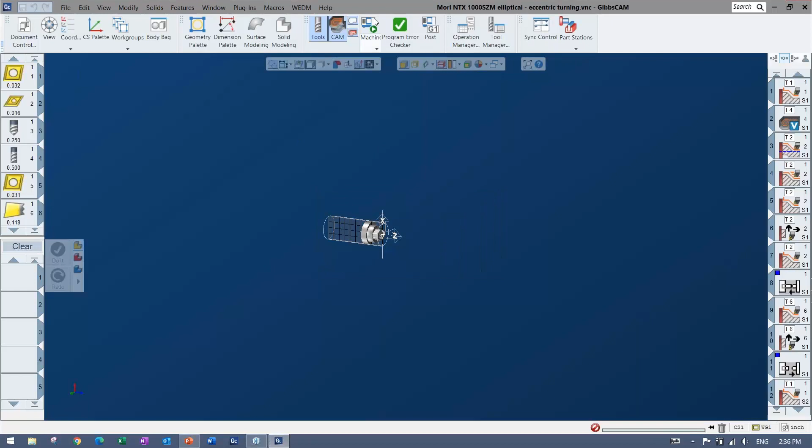All right, so that's really what I had to show you guys here. I'll end just with the B-axis — that was one that was requested here — having a full milling head inside your lathe. So I'll bring that up and then we'll move along.

So here you can see the B-axis that can access the two spindles. There's a sub spindle here, and there's a turret there as well that can be used. Everything can be synced up.

You'll see some elliptical turning here, where it's using the Y-axis, turning a shape, not just something that's concentric. It's going to turn that, turn some more, and then the sub is going to come in, grab it, and go over. It's going to machine on that side, and it's all fully simulatable with collision checks and everything.

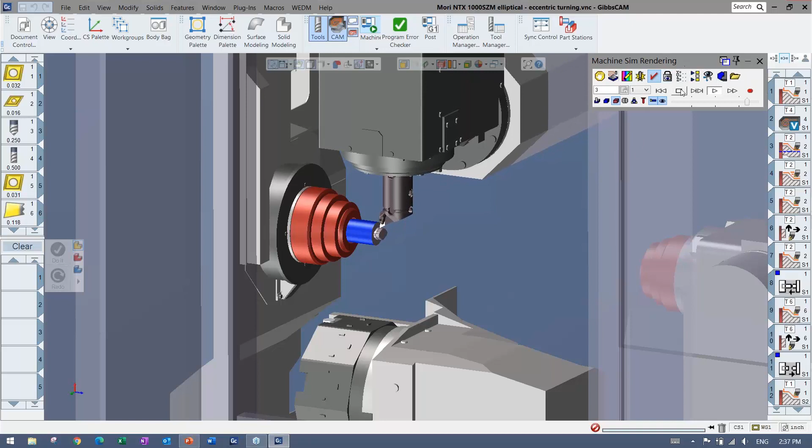All right, so hopefully that looks good and everything made sense to you guys. I'm going to go ahead and open it up for questions now and see where we get there.

Well, hey Dylan, this is Bart. Can you hear me okay? Yes, sir. Hey, and I called you Dylan. Sorry, Brandon. Hey, that's okay.

Thanks for doing a great job showing how easy it is to program a simple mill-turn part in the GibbsCAM environment, and also at the end showing how GibbsCAM can grow with your machine. So if in the future you end up getting a machine that's more involved — for example, has a B-axis head or a tailstock — you just add a module onto GibbsCAM and you can program those machines as well. We do have a few questions, so what I'm going to do is read the questions that we have, and why don't you go ahead and answer them, or we'll answer them together.

The first one I thought was a real good one, because this part looks like it could be part of a family of parts. So we have a question that says: can you automate the programming? In other words, what are the different ways we could automate programming of a part or a family of parts like this in GibbsCAM?

Yeah, I'd say I see a lot of people copy the file, bring the new part in, and take all the operations and put them on the new part. But if you're looking for real efficiency, I'd say a family of parts macro is probably the best bet, where literally the macro is like instructions to GibbsCAM. It can run on variables — you could have maybe the print open and you're changing dimensions there, and it would suck all those in and literally draw, model, and make all the tool paths based on whatever you had going on as far as tooling and all that.